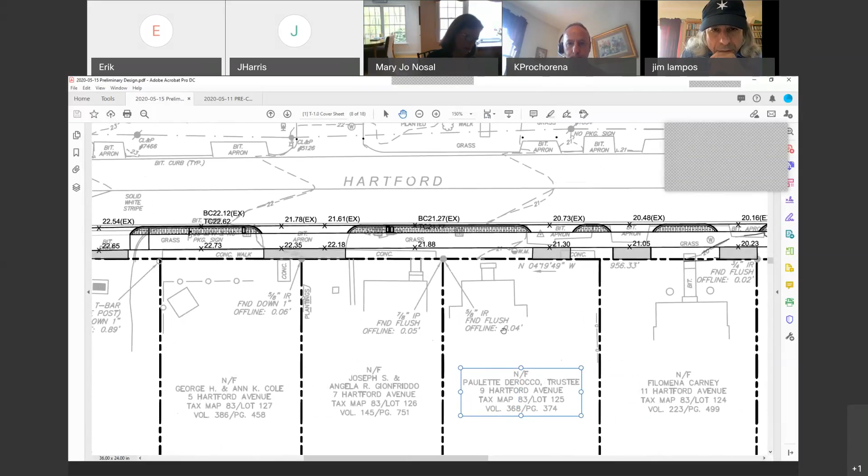So Jesse, you were saying the shared driveways are about 16 feet wide? Yeah, like right here at 5 and 7, I tried to standardize those. Again, as you see it down the street, the curb returns into the driveways are all standard at 5 feet. But I tried to make the width of those shared driveways around 16 feet, though that varied a bit depending on how we met some of the existing driveways. Mainly when they had, like here at 27, they have a paved section—I held their outside line, and made it come across to 29. If you recall, 29 is the one that has a newer patch right where we're showing this ramp, which we believe they paved to give themselves extra space in front of their house. I got rid of that and gave them a driveway curb cut that generally aligns with the edge of their driveway.

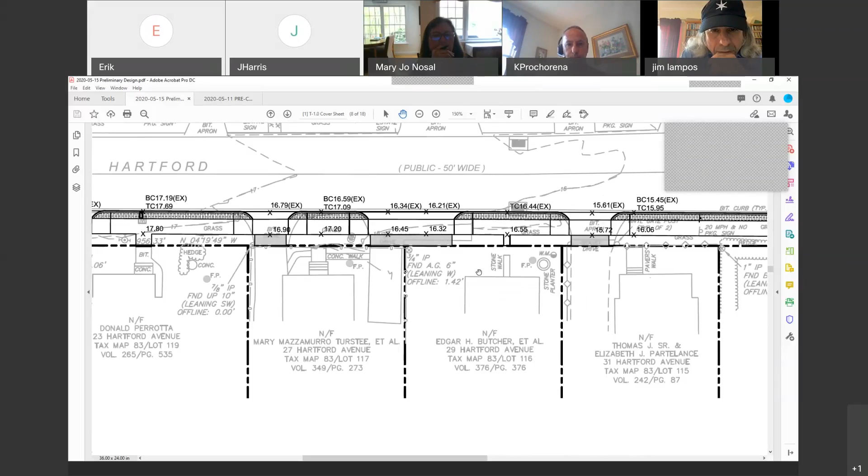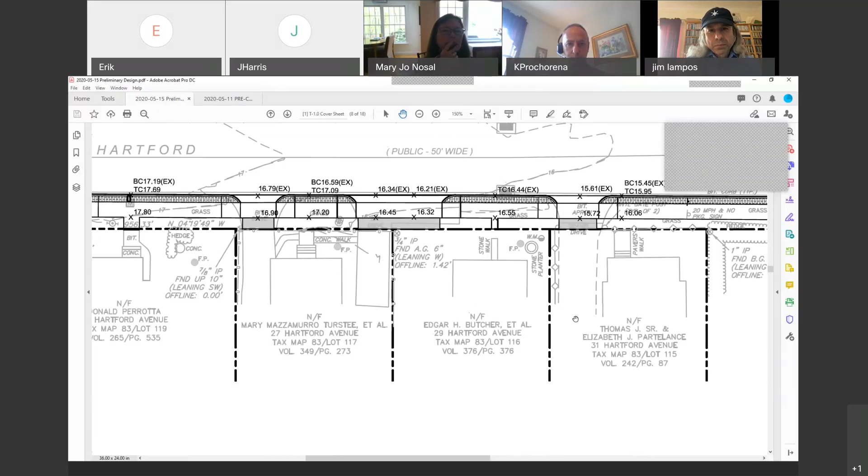So Jesse, just to confirm—quick question. The portion the cars drive on, that's actually sidewalk, is that lower than the actual sidewalk? Does it ramp up and down? Is that what the proposal is, is that how it works? Yeah, because to get the driveway to meet existing grade as close as possible, so we don't encroach onto their property to make that grade difference work out, and also so we don't bottom out a car trying to traverse up and over our sidewalk. I was just trying to visualize the sidewalk going up and down as you go down the street. Yeah, it's very similar to what we did on phase 1. Okay, thank you.

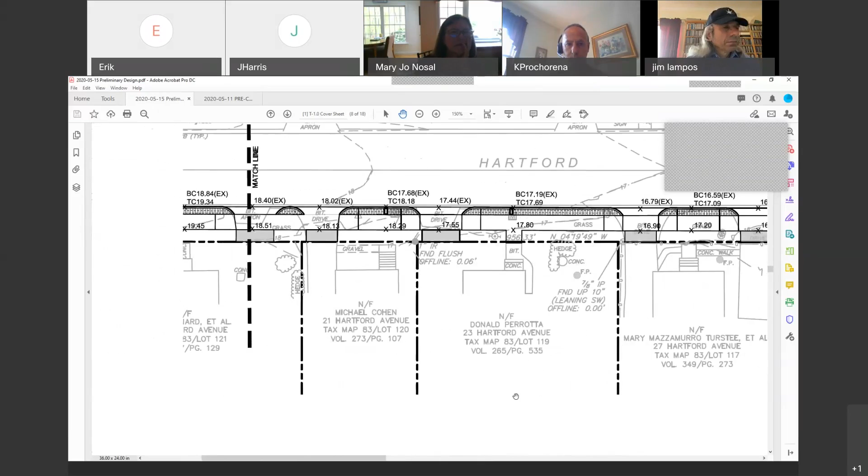So I am afraid I've got this recording message right in the middle of the map, and I'm afraid to X out of it because I'm afraid I'll stop recording. I'm not sure. It's right in the middle of everything I'm trying to look at. Maybe I can move this up. I forgot about that—that didn't happen before.

So the width on the single driveways is about what, Jesse? About 12 feet, that's what I was trying to shoot for. The town ordinance right now on singles is no less than 10 feet, and I think the maximum is 16. Oh wow, that's great.

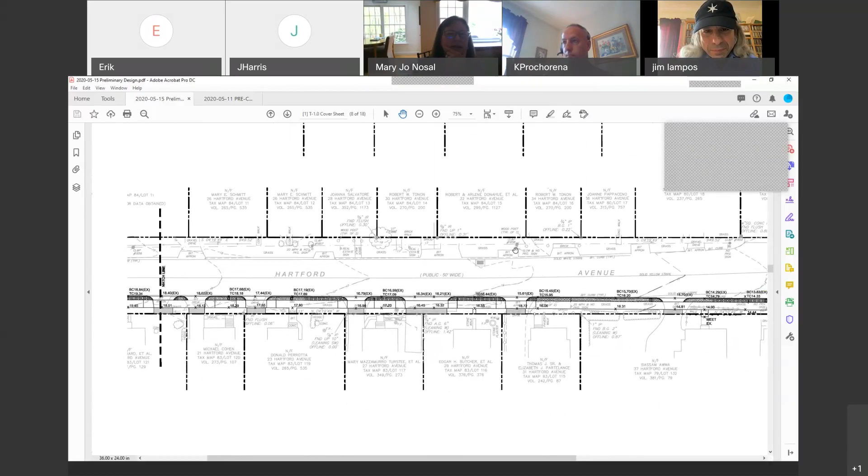It looks beautiful from what I can see. I think it'll really look nice—it will certainly clean up that edge. We'll organize the signage as part of the project, the mailboxes, just kind of uniform curb cuts along that entire stretch.

Do you think this will be the version of the plan that we need to share with the property owners? Yeah, I don't think there's anything at this point, from a sidewalk layout standpoint, that's going to change. It's really how we address and how much encroachment we want to take on as part of the project to get the grading to work out. I think at this point that's really the remaining piece—everything else is in place for us to move through and complete the final design. It's just those few properties.

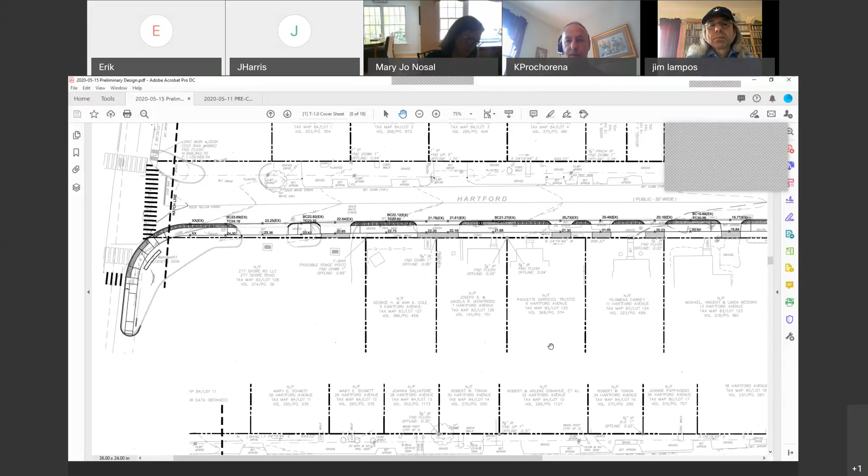That's really the last piece to the puzzle in figuring out how we either engage those people or determine what our approach is going to be, so we're consistent across the board, not leaving things very open-ended, which in my opinion translates to a blank checkbook with the committee's name on it. We don't want to go there.

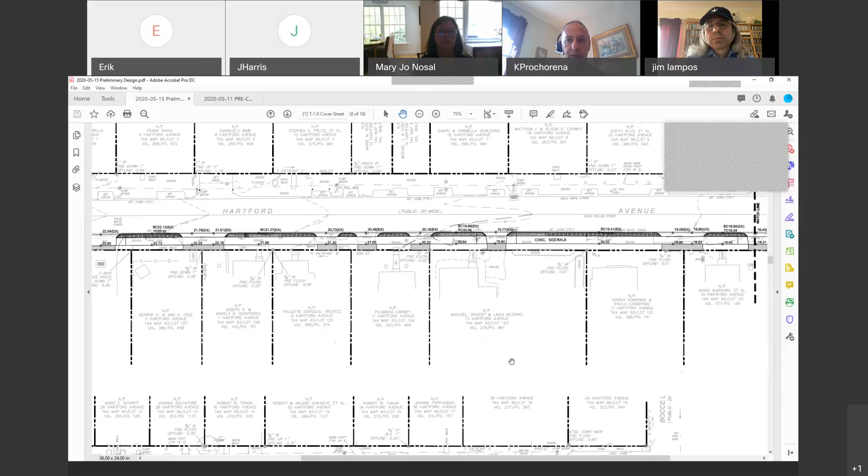Jesse, I'm not sure if you mentioned some of the ideas that you and I were developing as far as options to present to people. Did you talk about that? No, I haven't got there yet. So if this is a good time to mention that, Jesse please chime in. As a follow-up to the last meeting, Jesse and I were talking about how do we come up with design options that are not open-ended.

Knowing that for these properties, you could come up with design solutions as far as the imagination goes, we clearly don't want to go there, especially in a situation like this where we want something that's practical, that looks good, that is safe, that's affordable, and that keeps the property owner happy. We don't want to get into a situation where the property owner looks at this as an opportunity to do a bunch of work that they've been deferring for the past 20 years at the convenience of the committee.

So we were kind of thinking, and this is something we really wanted to discuss at today's meeting, get your thoughts. Maybe we present people with a defined number of options, almost like a menu, and we say you can pick from this set, whether it be 2, 3, whatever you want it to be, these defined approaches. Jesse could talk about the different approaches, and within each approach there's a bit of what I'll call enhancements, just to make it palatable to a property owner.

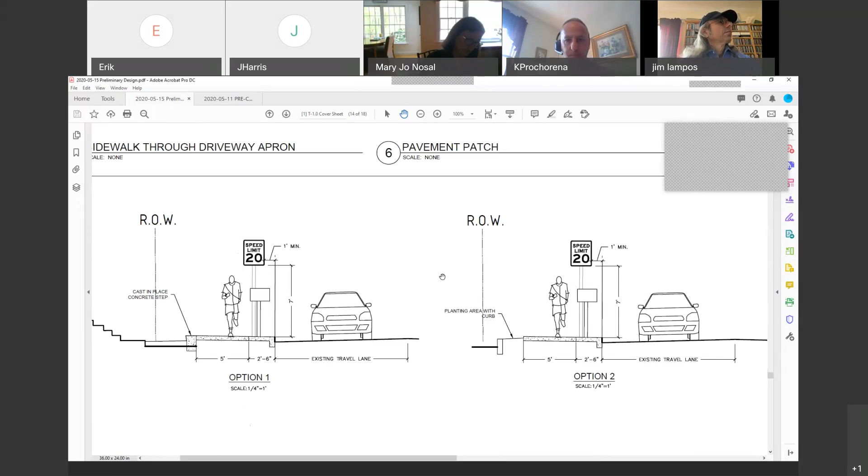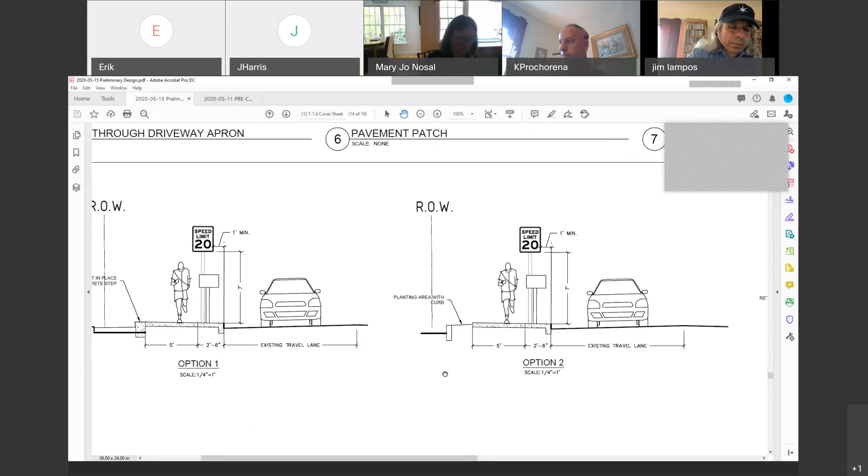Yeah, so in terms of the options, I've come up with 3 kind of basic options. Option one here on the screen would be providing some sort of concrete step from the back of the public sidewalk down to their walkway, their doorway, whatever they may have existing already. The other would be in areas that may not have a doorway or walkway leading out front, and there might be some other obstruction like a fence or something else on their property that we don't want to disturb, where we'd do some sort of retaining mechanism.

This is where those additional sub-options would probably be available. In option 2, I'm showing a 2-foot wide planted area with some flowers or something like that, and then some sort of retaining structure. Kurt and I had talked about this could be a nice granite type of curb, not your traditional roadway curb - more of a landscape curb with a nice bull nose on it. We could do a hammer finish.

You wouldn't have to - you could do 4 inches wide, something that doesn't read like a roadway curb. Something nice - you could go precast concrete. A lot of times those look really nice nowadays, where they color and texture them to look like natural stone, to something as simple as just a landscape timber. Certainly not as durable, but again, from our point of view, we're trying to eat up the grade change difference between the existing and proposed without filling up against their chain link fence or some other structure or element they have on their property.

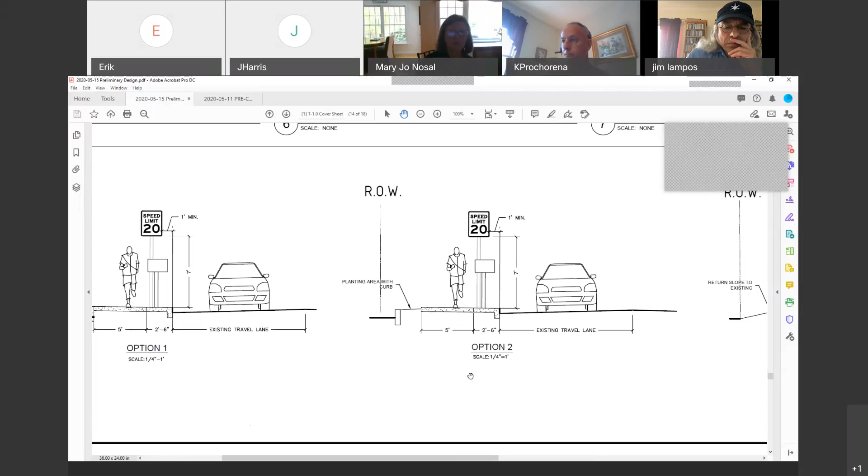And then option 3 is certainly to do nothing and just slope the grade down to the right of way, and that's it.

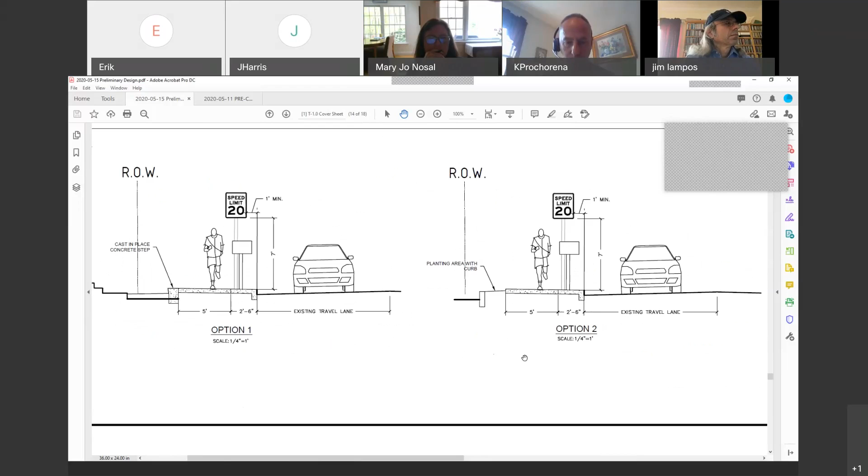Options 1 and 2 would be utilized where there's a larger or much higher difference in grade. Option 1 with stairs, that cross section is actually taken at 27 Hartford Avenue, where it has the wood steps coming down, and then a wood landing at the bottom of the stairs.

So I'm showing one step, and then you would potentially fill up, or maybe even this project paves a little walkway to meet their landing. So it basically fills that low point so they don't have a puddling situation there. There might be situations where we have to get six more inches to get down to a walkway they already have, so we could add a second set of steps. By code, we can go two steps, or no greater than 12 inches of grade change, without handrails.

Jesse, this is Kurt. Quick question, what was—this will help the committee develop this mental picture, and then I'm actually going to share a photo in a second that I took out in Hebron.

What along this particular stretch is the greatest grade differential we're dealing with? It's probably 15 inches, if I recall, which isn't as bad as we initially thought it would be, and that's why that supplemental surveying was so important that we talked about last time, because your eye will fool you every time. So that's why we wanted to get that stuff. In my mind I was thinking it was 2.5 feet, so that's actually pretty good.

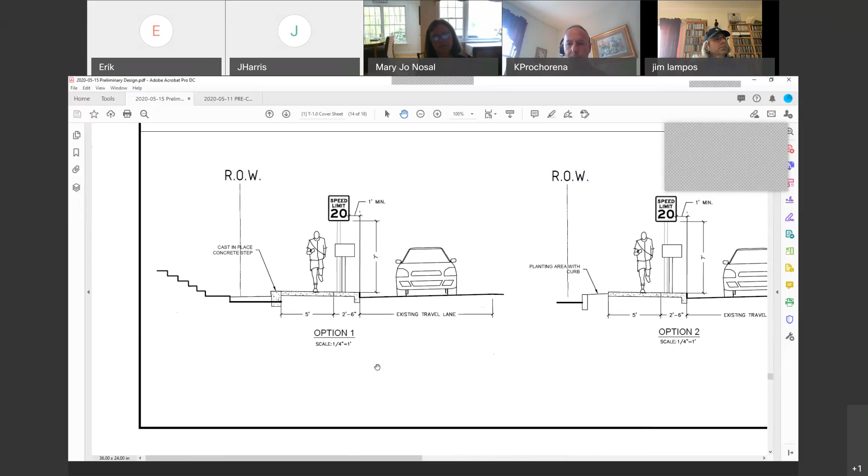Hey Jesse, if I can share my screen. Is that from the top of sidewalk, 15 inches, Jesse? That's correct, yep, okay. And then I'll turn it right back to you, Jesse.

I'm just going to show you a photo that I took in Hebron. I have a habit of pulling over and taking photographs of the world around us. My family sometimes yells at me.

So what I'm going to show you is a sidewalk they did in Hebron, and it's a good example of a slope. Can you see that? There it is, okay, yep. So although this is more of what it's going to look like along Route 85—although we're pretty flat—I thought this was interesting because it shows how they just sloped down from the back of sidewalk. In this case it's just undeveloped, more of a drainage swale, but with the most basic approach, simply sloping down, this is kind of what it would look like. That's probably greater than what we have, but it's kind of close. This was just a good example of the most basic approach: from back of sidewalk, slope it right down and seed it. That's kind of what it would look like, a good real world example of something out there.

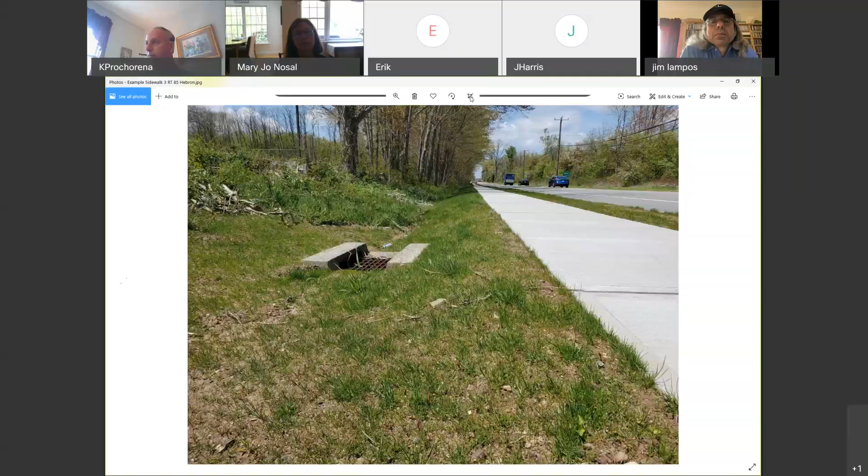So I'll stop sharing, and Jesse, you can get the plans back up there. Thank you, Kurt. And then when we're done talking about Hartford Avenue, when we talk about Shore Road, I have a few more photos I took that'll be some other examples.

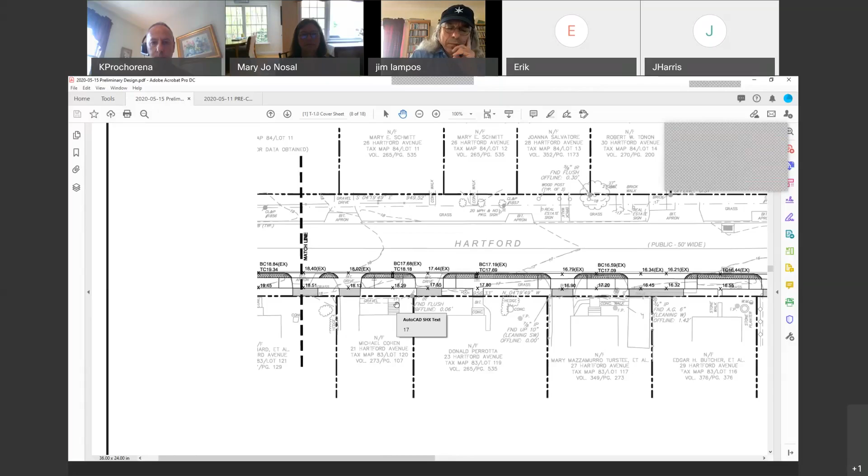Yeah, so actually I just double checked—that cross section of option 1 is at 21 Hartford Avenue, where we have these stairs that come down to a wood landing. They have a gravel walkway that goes off to the left or right, depending if you're facing their house, to their driveway. That's where they had that landing at the bottom, and then another 6 inches or so to the grass. As you can see here, we're at 18.20 at back of sidewalk, and we have this 17 contour generally at the bottom of their landing.

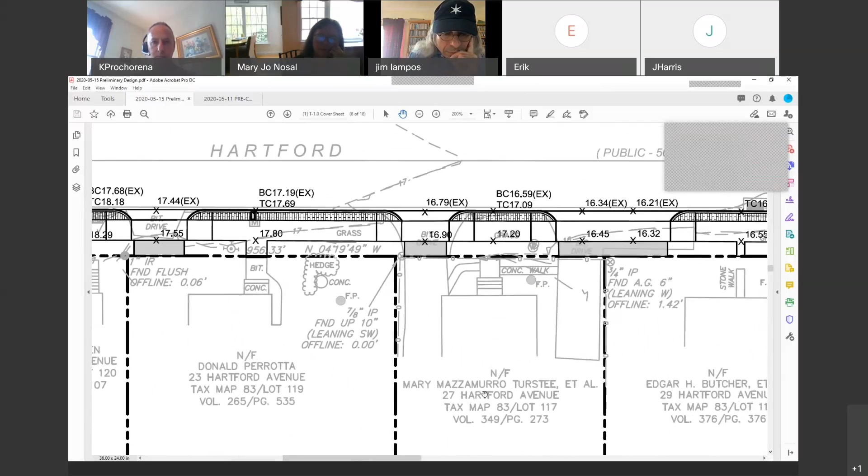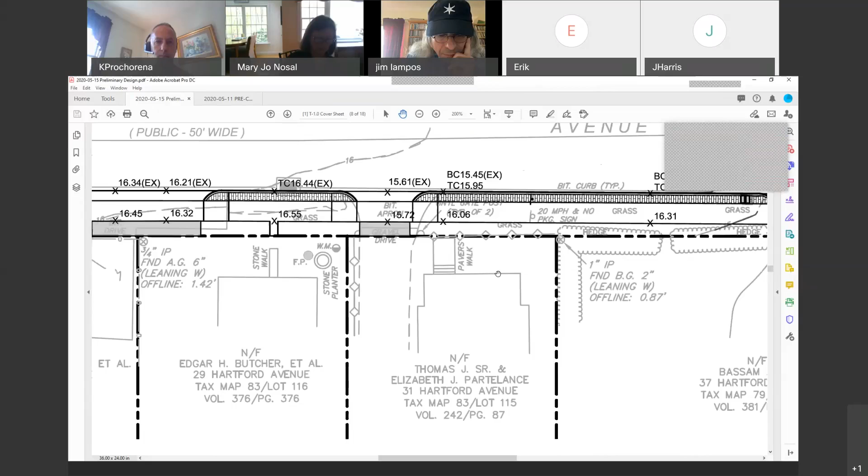So that's the scenario at 23, possibly at 27, another one at 29, 31—these all have walkways already leading essentially to the right of way. But if we wanted to provide that connectivity from the public sidewalk to theirs, we may have to put in a step or two to make the grade match. Right now, other than this one here at 29, I'm not showing any other connections, but I think that, or 23, could be connected.

That might be worthwhile for the committee to do. Because I think what the intent was originally, when the sidewalk was more or less at the right of way, they did have that connection. And then over time, that walkway disappeared, their sidewalk didn't.

So are these the only areas where we would be doing more than just some seed and dirt? Jesse, when you went back out there, these particular areas, like from 21 down to Bocce Lane, or not so far down to Bocce, those are the areas you're referring to doing something beyond dirt and seed.

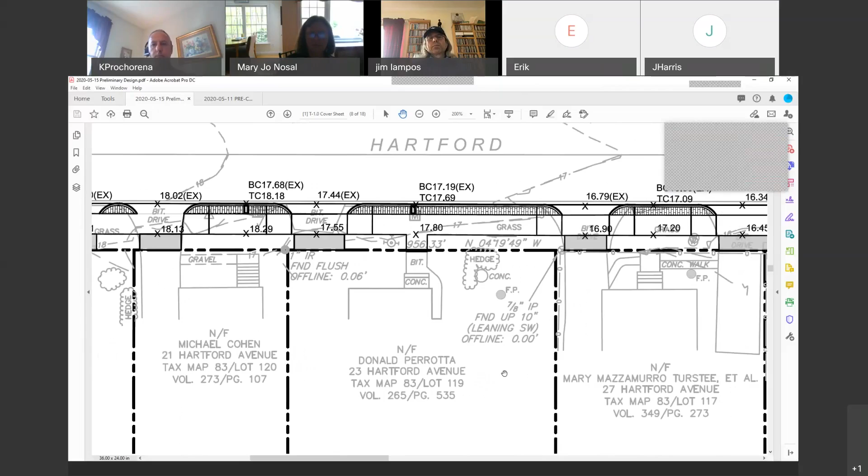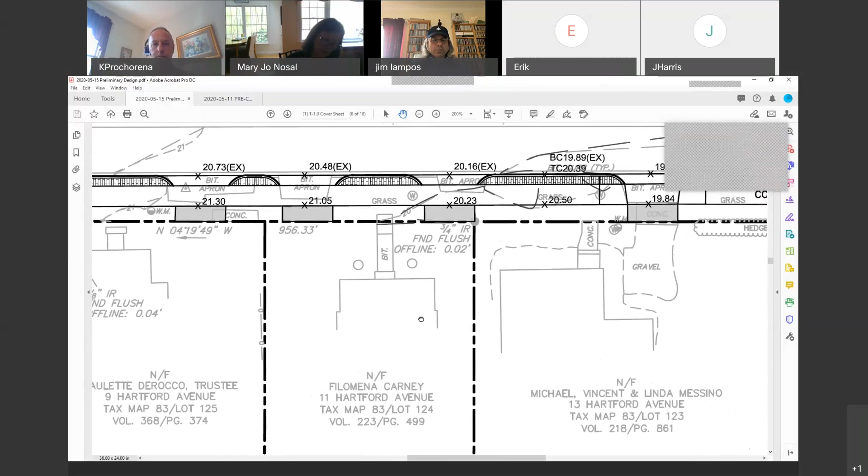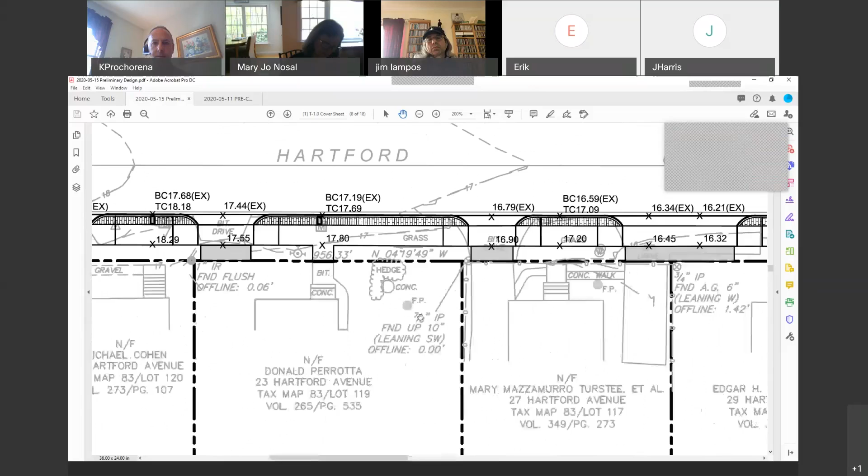Okay, thank you. So I guess that's a good question for the committee. You don't have to decide that today, but in those cases where there's a walkway that does not extend to the edge of right of way, do you want to include in the project connecting the existing walkway to the back of sidewalk? In other words, fill the gap.

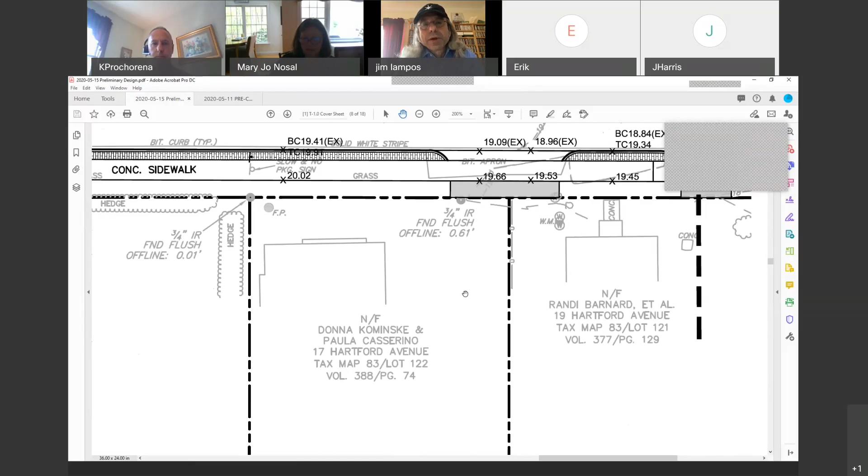Personally, I think it would be a good idea, this is Jim, because it would be like a shirt tail untucked if we have a sidewalk and then there's someone's existing sidewalk and we just leave this gap sloping down and seeded or what have you. Could be the homeowner doesn't want it for some reason, but in terms of initial design that we would present, I would prefer to see us connect to their sidewalk. It'll look nicer. The homeowner won't be stuck with a sidewalk to nowhere and then a little ramp up to a grassy knoll going up to our sidewalk - tie it all together.

Unless there's an objection from the homeowner. So Jim, you're saying if they have a walkway that comes out straight from the house towards the street, we connect. If they have a walkway that goes to their driveway, then we don't have to necessarily do anything. Right. Okay, yep, I think that's a good starting point.

And I guess it comes down to cost as well. So 19, which is on the screen there, is a good example where their concrete sidewalk ends at the right of way. So in a sense, we would be filling in between where that walk hits the right of way and the back of sidewalk where you see that spot grade 19.45.

Can those be sloped, Kurt and Jesse? Like a slight slope, not that it has to be perfectly flat. Can we slope down if the grade changes slightly on those areas? Yeah, I think the closer you get to Shore Road, we could probably do just a slope to connect the two. Okay. The other ones we talked about that are much greater grade difference would require a step or two.

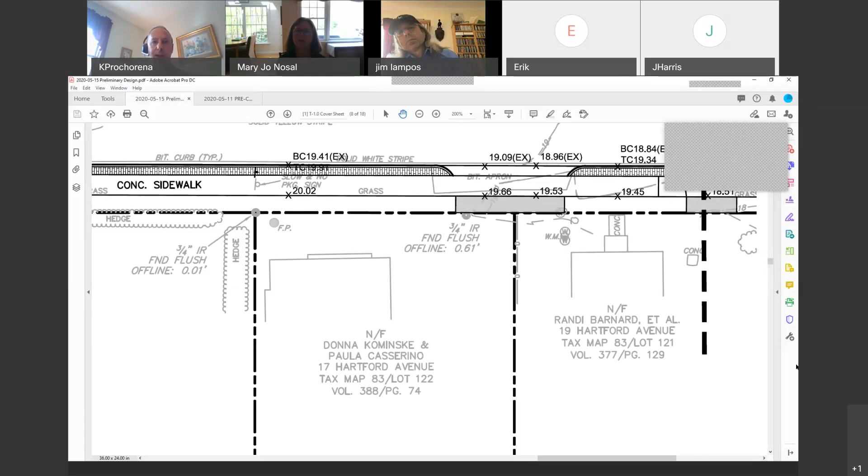And the reason that we didn't is we were replacing in kind. And after talking, actually it was Keith at the time that said, don't worry about it because you're replacing in kind, you're not really creating anything new. He said, I don't think that's necessary. I see. And it may be the same thing in this case, but because we are, with these particular properties, creating something new, that's where I get a little concerned that it may fall under his purview.

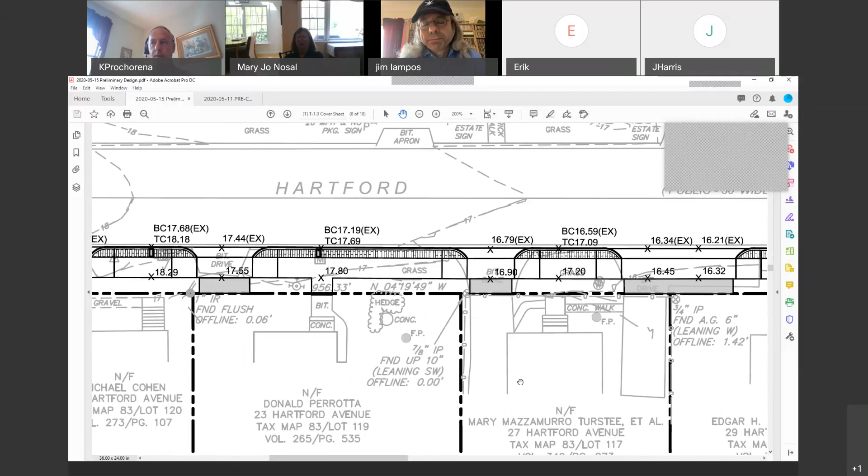Okay. Quick question, Kurt. Do you have a sense of the sidewalks that exist coming from the homeowner's front door? Are they in decent shape? Or are there a couple where we're going to be meeting a new sidewalk with something that's kind of rough and broken up? Yeah, Jim, that is an excellent point.

And I'm actually calling up the Hartford Avenue PowerPoint, and I'm going to quickly look. I think it's a mixed bag. I'm just going to actually quickly scan through this to see. Do you want to share that, Kurt? I'm going to go through it so quickly.

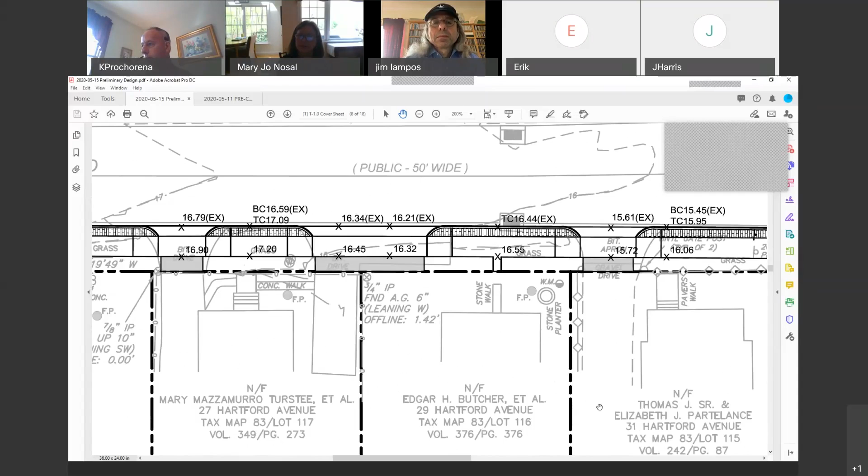So I'm looking at, for example, number 7, it's okay. Number 5... looks like number 9, number 9 has a very small little landing, so it's not really a walkway. 11 has nothing. 13 has nothing. Quite a few of them don't have a walkway, so I guess that's actually good news.

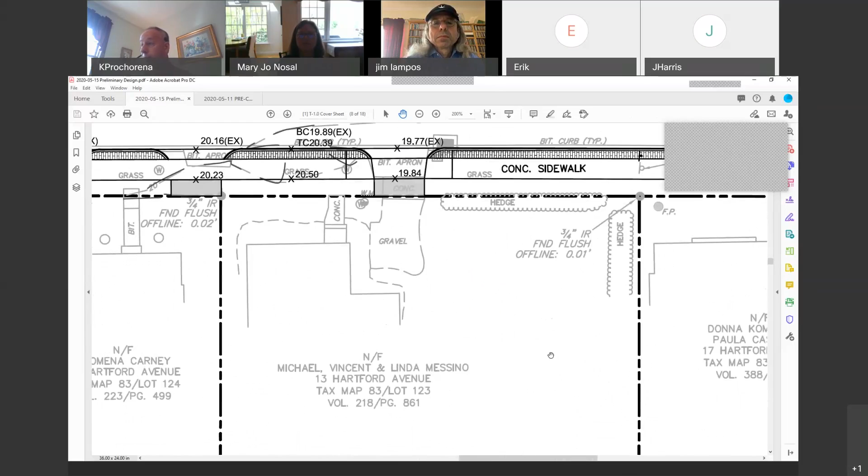19, it looks okay. 21 is the one with the wood landing. So there's an example where it's a wooden landing, which is not the best. That's a situation where we could end up doing concrete right to the bottom of their step. That's not that big of a deal.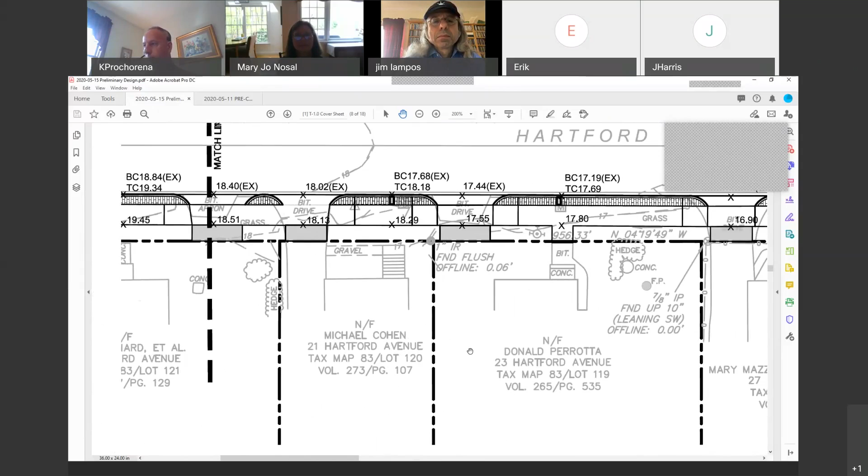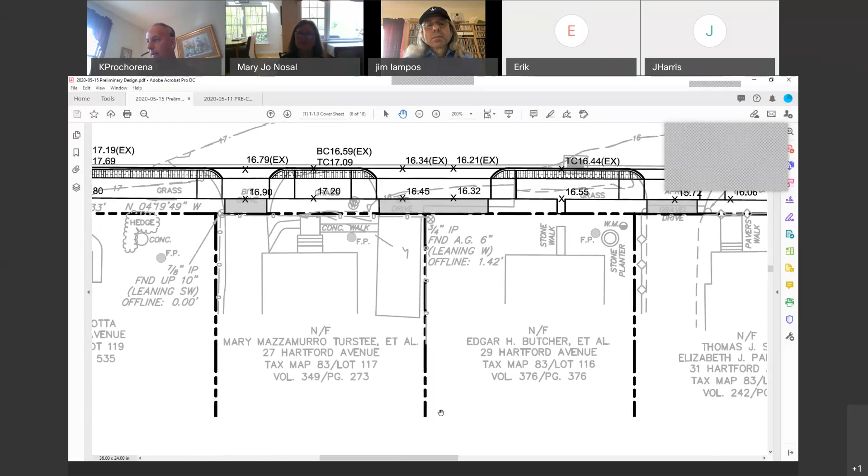23 looks good, it's in good shape. 27 is interesting, that's the one with the chain link fence and the brown privacy slats, because their fence is right up against the right of way. That's kind of interesting, but their walkway is in good shape. If you recall, they have a swing gate at their walkway that ends right at the edge of their little landing. 29 does not have a walkway.

So when you say it doesn't have a walkway, does that mean it doesn't cross the right of way? For example, 29, there's just a landing and then it ends. There is no formal walkway.

I'm looking here on the survey. It may be buried in the photo I'm looking at on 29. The survey says stone walk. I'd have to get a different view. The one I'm looking at is kind of skewed and hidden in the grass.

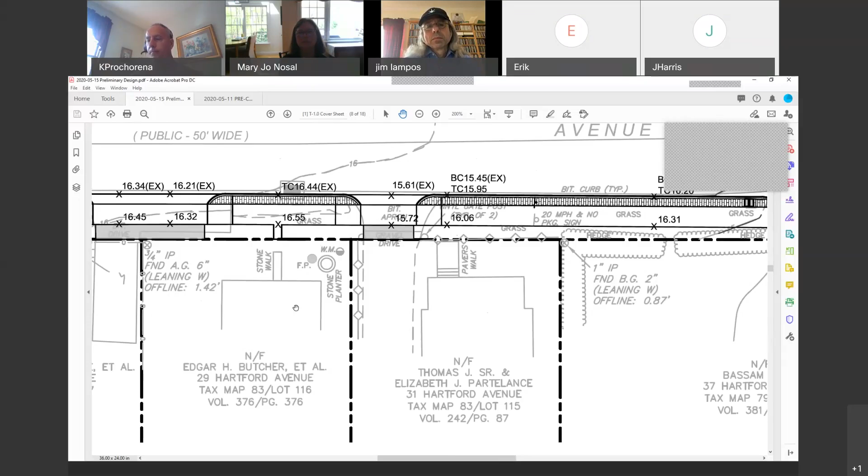But we have enough photos where we could get something definitive. Based on this quick look, it looks like most of the sidewalks are in pretty decent shape. There's none that are completely deteriorated.

Good, 31 is in phenomenal condition, it's pavers. And then as we get past that, we kind of end up... don't forget down on...

Right at the very end, the concrete sidewalk that's in excellent shape, 37, we'll have to do something with. It looks like Jesse has connected it, which I think is absolutely appropriate, but that sidewalk's in really nice condition.

And then that first house right on the corner, that building with the red painted wooden ramp complex out front, that's 37, has that secondary door, the market. Yeah, we need to maintain access to that secondary door.

Right now it looks like our back of sidewalk is right at the edge of their bituminous, that's in front of all that. But by the time we grade back, this is where those grading areas might work out in our favor, but we might have to repave a portion of that just to blend it in. Jesse, do you want me to share my screen?

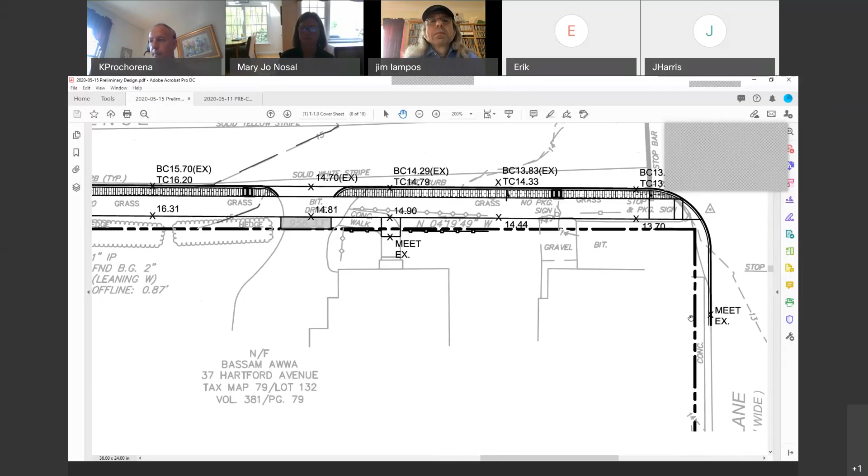I have a photo of that up. Yeah. Okay.

The survey just doesn't show enough detail to really convey what we're looking at there. Can everybody see that? Yep. So if you see that light blue line, that's essentially the back of the right of way. If you look way down, you can see the shrubs we always use as a point of reference. The right of way is basically at the middle of those shrubs.

So our sidewalk, as Jesse was mentioning, is just over the grass into that bituminous area. Their back of sidewalk is kind of right at the edge of the grass there. So he's got that door, you can see it behind the ramp. Kind of hard to see, but it's a red door on the other side of that ramp system. So we need to maintain access back there.

Not sure what it is, but we may have to look at filling in - this is kind of similar to what we ran into on the first project, almost the one situation that's very, very similar. We could end up having to do something, either a curb to make that grade transition, or fill back to that ramp. We'll look at that a little closer and bring something back to the committee.

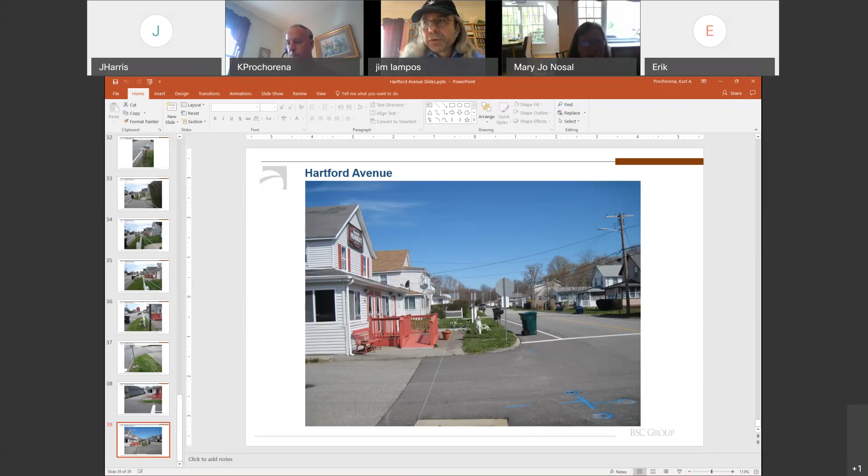And Kurt and Jesse, did we get a final on the driveway solution? Is that up for 21 to 31, the properties of low elevation? Are we thinking gravel or?

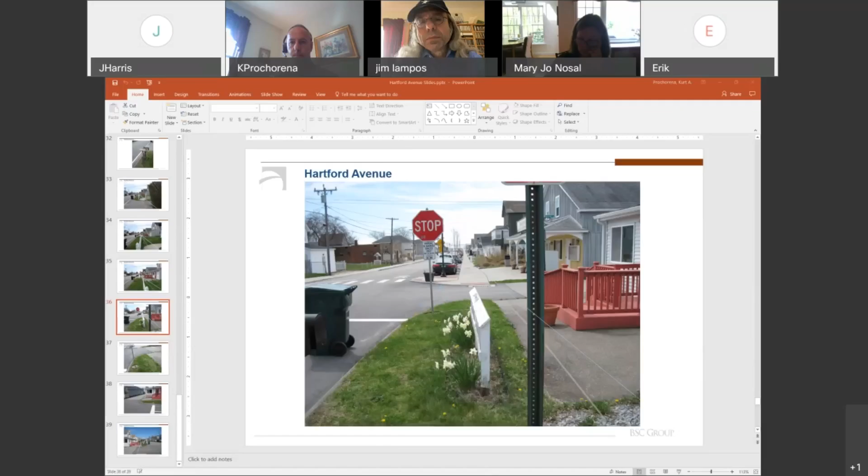Well, your current town ordinance requires paving up to the right of way or 15 feet, whatever is greater. But in this case, most of them - there's one that's real coarse gravel, and I think a couple that are actually paved, and some that are just grass. So it varies what the material is, but I think as part of the project, we would pave to our right of way, whether they had gravel, grass, or pavement anyway.

And I thought we were talking about concrete - were we? Are you talking from the road to the sidewalk? That'll all be concrete. And then what Jesse's referring to is from the back of sidewalk into their property edge, right. Yeah, okay, sorry. No, that's great clarification.

And then the properties that we have to go onto slope that driveway down, I think there's just a couple of them. Is that correct, 21 to 31? And then Jesse, if you want to maybe share your screen again, we can look at the driveways.

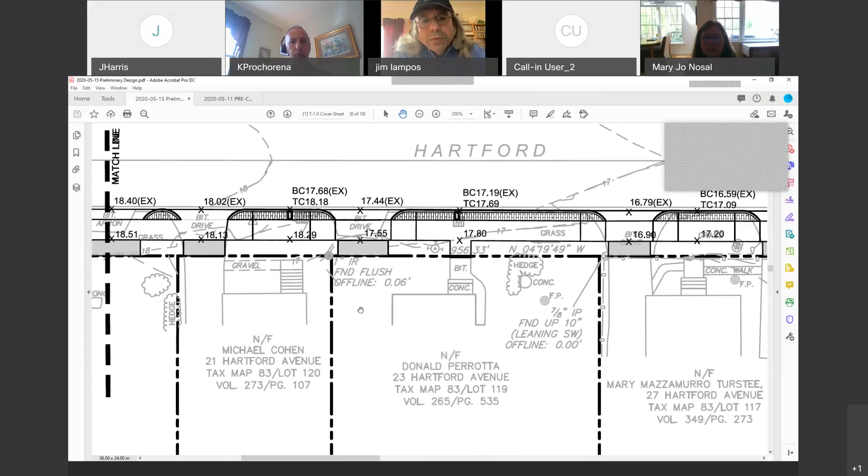And I guess the question is, if we found that in order to make the transition—let's use 23 as an example—if we had to achieve the appropriate slopes by extending onto their property with some grade changes, what would that material be? For example, where it says IR there, let's say we had to extend into there to make the slopes work. What would that be? That's my concern.

On the one hand, you could say we'll just make it grass like it is today. But that grass has probably been there a long time, and the material's compacted. If we go in and try to plant grass on something like that, it's never going to last—it's going to wash out. So in those cases, maybe we do something where we're continuing the pavement, where Jesse has it indicated in gray, or gravel, and we just extend it in and hope they look at that as a positive.

I wanted to throw in something I've seen. They use it under the Williamsburg Bridge in New York City at East River Park, and there are different qualities of it—some has a tonnage rating that's really high, you can put heavy equipment on it. These pervious pavers are actually more like a ring, not typical paving stones. They're just a ring that locks into each other, and grass grows up in the middle of them. The advantage is it holds the earth in and provides almost like a pavement surface, but once the grass grows back it looks like grass, and it can handle vehicular traffic without being dug up like gravel, which flies everywhere and is a mess, especially if you're going up a grade and your wheels spin out. I don't think it's that expensive—we're not putting industrial grade weight ratings on these driveways, just something to handle an average car to pickup truck, and we won't be covering a large area. So I wanted to throw that in as a possibility.

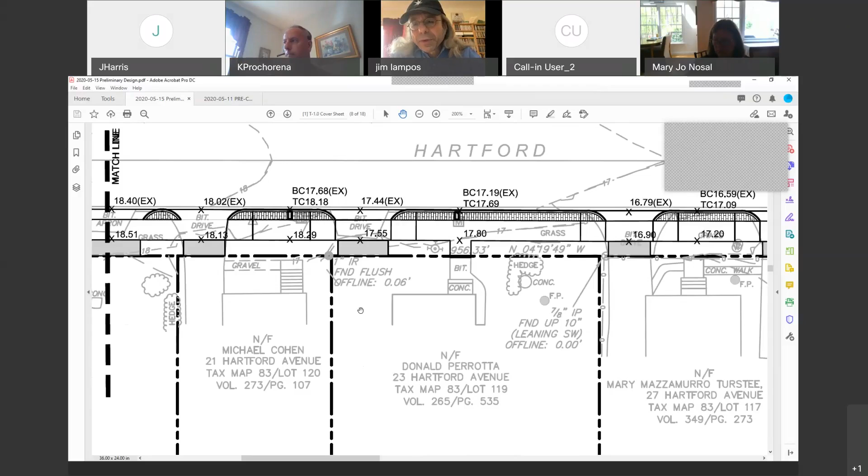It sounds like you're talking about a grass pave type product. Yeah, it's almost just like a square ring, totally hollow in the middle, so grass grows up through it. We've used that with success on some projects. I think those look good, and they may work well in this really damp, wet environment we have down there.

It can help promote resiliency because we periodically have flooding and those kinds of things. Yeah, I think that's a great idea, Jim—it makes sense in these applications. If we decide that where it's grass, we're going to keep it grass, I think we should use a product like that. Bonnie, wasn't that your thought a while ago, kind of like what we did at the boathouse?

Yeah, I think it's called reinforced turf. I had brought that up too, so I agree it's a good idea. I also agree with Jim and Bonnie on that. It sounds like in that regard we also preserve some of the grass over time—we may keep the grass in the soil versus having it rot away, which is also good for any runoff. It's always better to have that low impact.

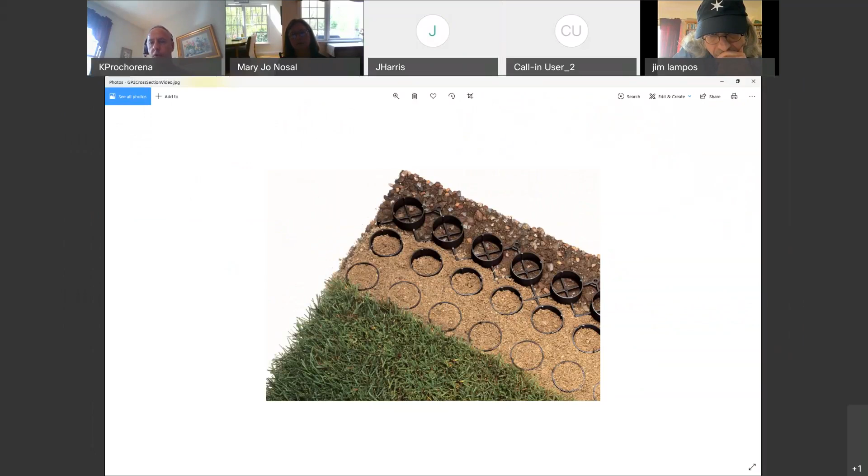So I don't know, can you see that? Yep, that's one product called grass pave, but very similar to what Bonnie and Jim are describing - it basically holds the matrix together. We used this up at UConn for a service entrance where they were looking for green solutions. They didn't want it paved because it wasn't used that frequently. They wanted to maintain infiltration and just the look, to have it be green.

We did a road that was probably 20 feet wide and about 600 feet long with this stuff, and it's pretty neat. What we would specify is we wouldn't do it by name - we'd give the contractor the option for a few products that are basis of design, but they all achieve the same end.

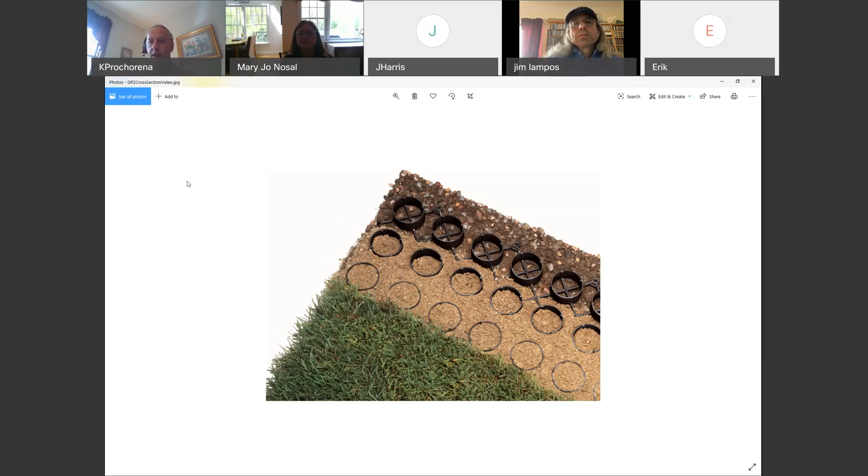Well, if I was a homeowner, I would sure appreciate that. Yeah, it'll look nice and it'll be good for the project because the grass will hold up better. You won't get those callbacks and people frustrated that the work we did is running off onto their property. So okay, we will incorporate that into the design.

So I think the remaining piece, circling back a bit, is how do we advance the design on these properties? We will prepare the drawing and send it to you, Mary Jo, that kind of shows some of the things and the limits of the work.

We'll get the building officials' feedback, but then at some point we need to think about, once we assume the building official, whatever he says, they need a permit, which frankly isn't that big of a deal. The contractor just gets the permit and hopefully the fees are waived and that kind of stuff.

But then as we move forward now with the final design to really start putting the fine touches on everything, at some point we need to engage the homeowners and get their buy-in, because ultimately we will need them to execute one of those temporary access agreements like we did last time.

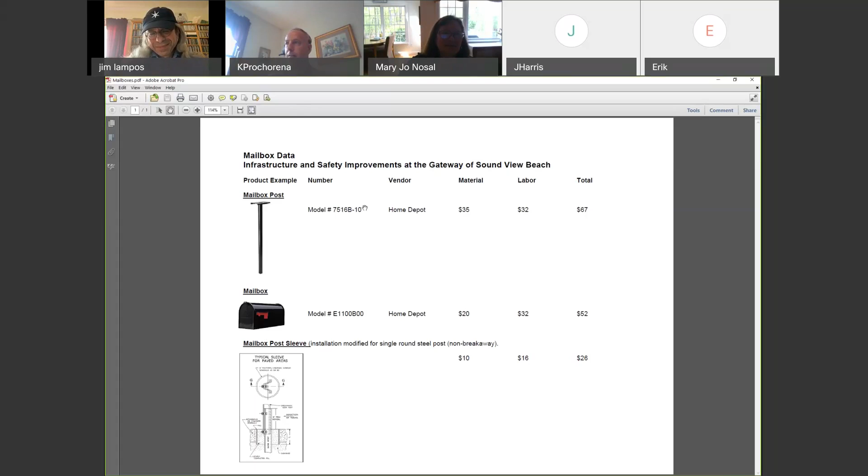The other thing that I wanted to show, if it's okay - I happen to be, this is here in Colchester, where I'm coming to you from now. I was pulling out of the Stop and Shop here, and I noticed they had done a project along Route 16. Let me rotate this photo. Not the best photo because I was stopped and took it out my car window, but it was an example.

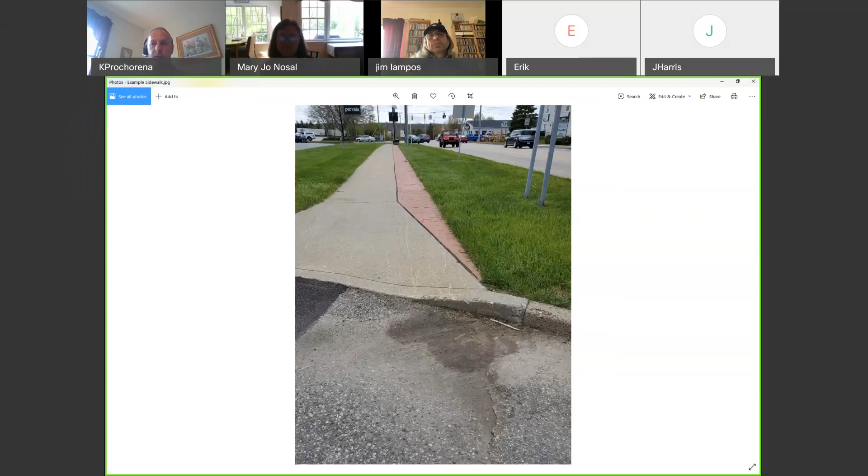Of the stamped concrete. Can everybody see that? Kind of a poor photo, but as you can see there, they added the extra width with stamped colored concrete. There's a bit of a wavy line because I think they adapted onto an existing sidewalk, so I would hope that the workmanship would be a little better. Yeah, I don't like to see that waviness - that kind of looks like crap.

I hesitate to say, but I like what you showed us before better. But I see how other people have adapted. We hope that we get better workmanship than they got here. One of the problems was, I remember when they did this, they did it in the middle of winter, and that's just the worst time to do this kind of work - you just do not get good results. I don't even see really what that bought them, honestly.

I think what ended up happening was they had a grant, and behind me, on the other side of my car, there's a new section of sidewalk because of a little development. I believe it was part of the Stop and Shop development - if you notice, the original sidewalk is not 5 feet wide, so this was their way of making it 5 feet wide by adding this on. Not necessarily the best approach, but the best example of real world I could find.

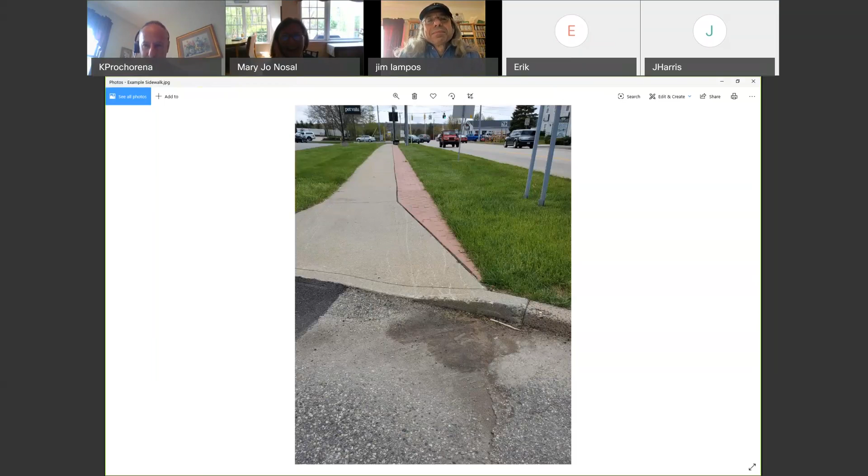As I was looking to the left getting ready to pull out, I said, oh, I got to get a picture of that. But yeah, here's an example - ours is going to look good. Good, and that wasn't your work anyway. No, definitely not. And that's where the punch list comes in, even being very detailed when Jesse puts together the finer points of the design.

Making sure the contractor knows, look, this is the standard, don't give us wavy lines, and make sure the lines of the simulated brick are crisp and straight, and we'll make sure we hold them to that. Okay, sounds good.

Thank you. Any other things for Hartford Avenue on your list? I think that was everything I have. Jesse, anything else on your list? Not that I can think of. Well, I guess there is one on the first phase - we had some decorative signposts for the stop signs and things like that. Are we continuing that?

We talked about that a few meetings ago, and I think Kurt shared that we were just going to use the signs we have and put the standard galvanized DOT standard posts on the signs. Is the committee still on board with that?

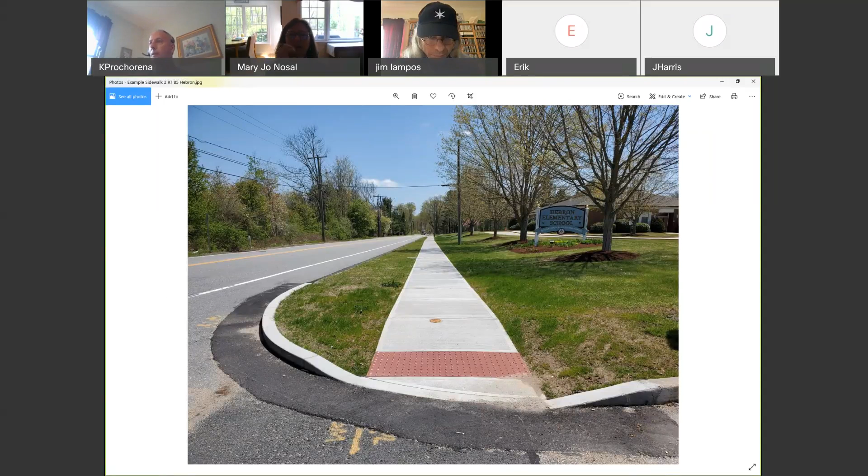But yeah, I thought this was a good example. You can see the utility poles - in this case they got lucky, the poles weren't in their way. We have a few spots though, and I'll share another photo that I took from the other direction.

That looked nice, Kurt, that's exactly what it looked like. I thought it was kind of neat - oh no, that's the other side.

If we do bituminous curb, I'm going to see if we can get away with not having to saw cut by putting the bituminous curb right on top of the top course. We'll see what DOT says, but I'm thinking if we clean it and put tack coat on there, it could save us a little bit of money. But that's a classic example of where they're going to really dictate what happens.

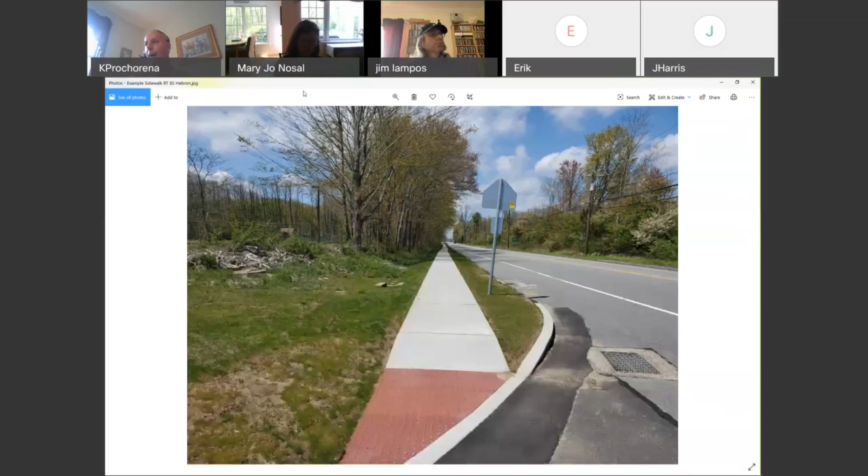On Shore Road, that's unfortunately it because of the lack of feedback from DOT. Speaking of DOT, we did send them the project update form that went up to Craig Babowitz at Newington. I had emailed him asking about grant extensions, if there was anything we needed to know about in light of COVID-19 issues. He said, no, not really. You've got your schedule, and there you go. So pretty limited communication.

If we did have any more specific questions for him, I'm happy to email him. When I sent them the form, I said, is there anything else you need? We're happy to have a call with you if there's additional detail. And I haven't heard back from him.

Do you know if he's going to cue us each quarter for this form, or do we just know to send that same form and repopulate it back to him each quarter? That's a great question, let me ask him and find out. I'm happy to put those together now that I've got the first one filled out, it's pretty straightforward. If he says you have to do it, I'll just put a calendar invite in and quarterly get that to him. Okay, thanks a lot, appreciate it.